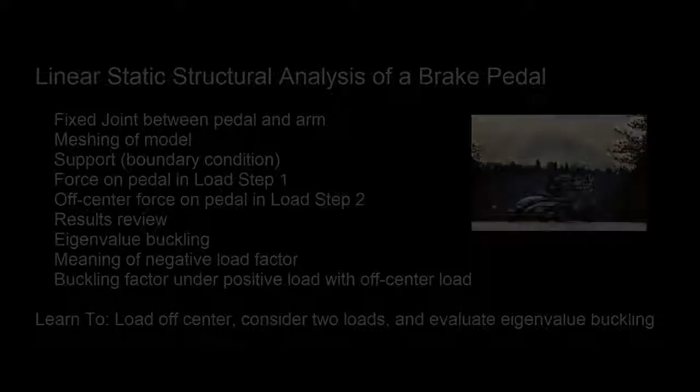And we'll do it with the off-center load from step 2. Let's go in and have a look at the model, but first, in the project schematic, you'll note that we're going to do a static structural run. And then, just to be cautious, we'll do an eigenvalue buckling analysis in order to ensure that we have a good factor of safety on buckling of the structure.

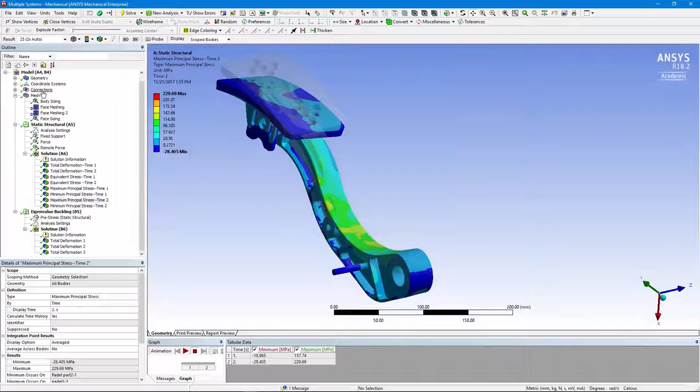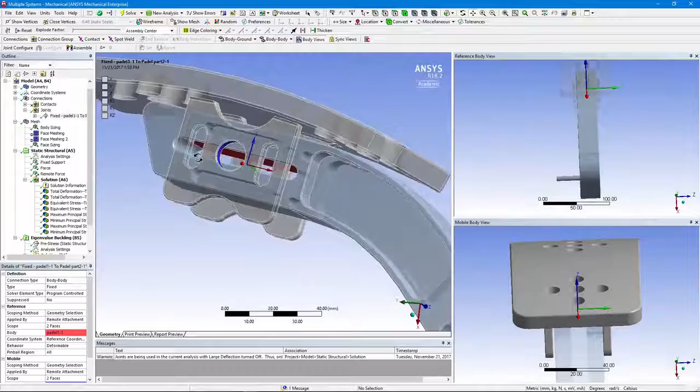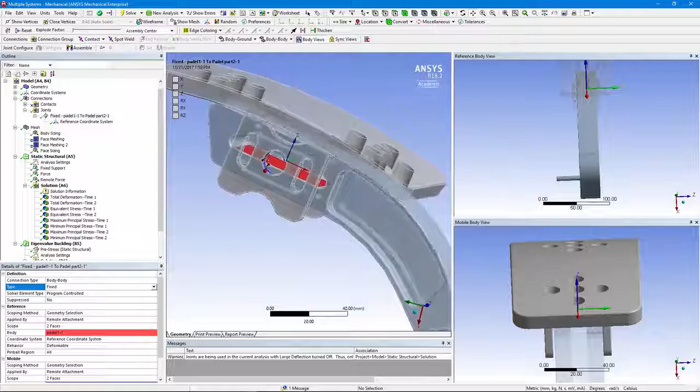Let's go have a look at the model. Here's our geometry. Two bodies, and the details of how they're bolted together have not been provided in the geometry. But what we're going to do is have a fixed joint tying these two things together so that they act as if you had one body without going into the complications of many faces in contact. So you can see that in this joint we have two red faces involved in the reference side and two blue faces in there involved in the mobile side of the joint. And this has been set right here to be a fixed joint body to body, so the parts will move together. It's a simple way to get them to work with one another.

Let's zoom back out. As for meshing, we did a bit of face meshing in order to get a cleaner layout of elements. Did a little bit of face sizing to keep elements of a tolerable size. So there's our mesh. It'll give us a first order look at what the stresses are in this structure.

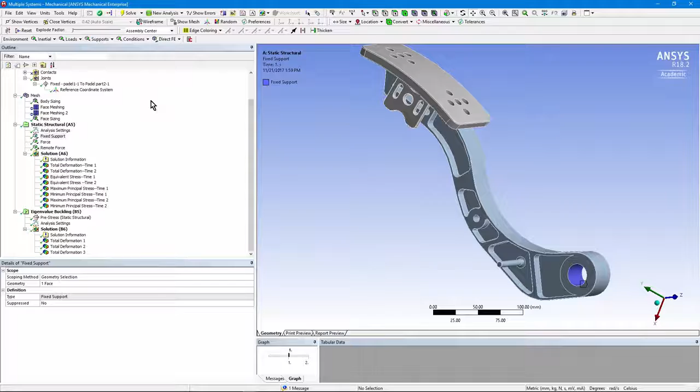In our analysis, we have two load steps. Here's the reason for this. First off, we've simply fixed the face down here, and we're going to put a load on this pedal and see what stresses result. So it's sort of a cantilevered structure. We have a force, which is spread out over this face. You can see that the angle has it perpendicular to this pedal or pedal face.

In the first load step, we're bringing that load up to 2,000 newtons. This is an estimate of the biggest load a person could put on there, and the load's been multiplied by 1.5 to get a bit of a factor of safety. So this is one of those approaches where the factor of safety will be built into the load rather than in the material allowable, where we'll probably look at yield. So there's a force. In the first load step, it's on. The second load step, it's gone again.

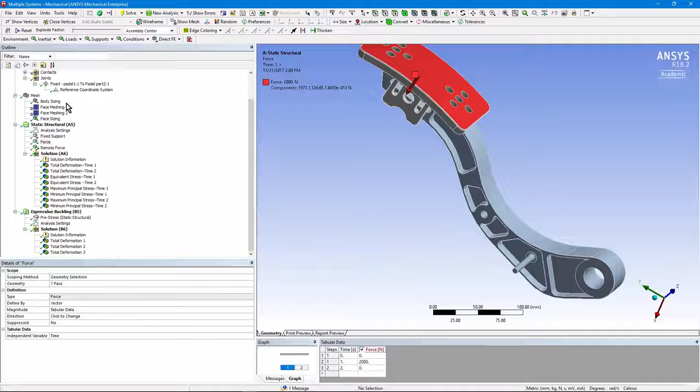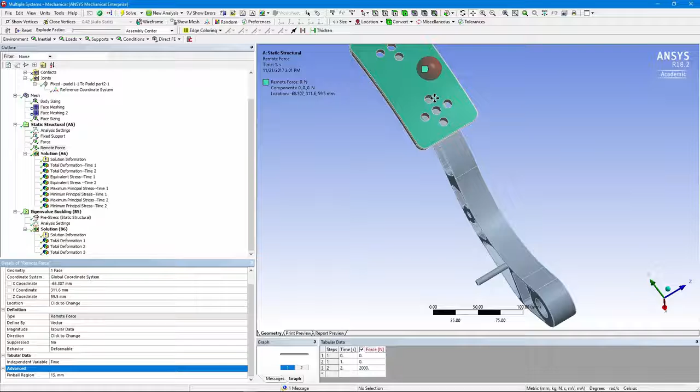Then a second load, remote force. Now let me turn on random colors, make that thing easier to see. We have a remote force. It's pushing in the same direction. It's been moved off-center. The z-coordinate has been shifted over to make it off-center. On top of that, a pinball radius has been defined, set to 15 millimeters, so the force is exerted only over this small region. That's going to put a bit of torsion in this structure. We wanted to see if that would produce a worse result when this too has been set to 2,000 newtons.

The load might be off-center if a person's foot was off-center when they pushed on the pedal. Note that it's on in the second load step. So with two load steps, we evaluate two different kinds of load on the model.

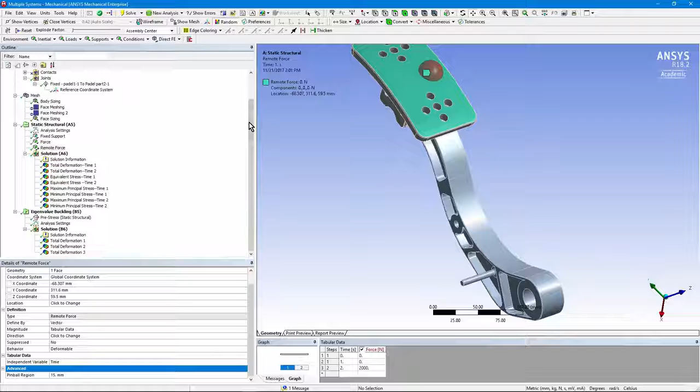It's a simple linear model, no nonlinear contacts, no nonlinear material properties, and the deflection is small enough we don't need to go into large displacement analysis. So there's our mesh. There were just over 100,000 nodes, so a bit over 300,000 degrees of freedom in this 3D model.

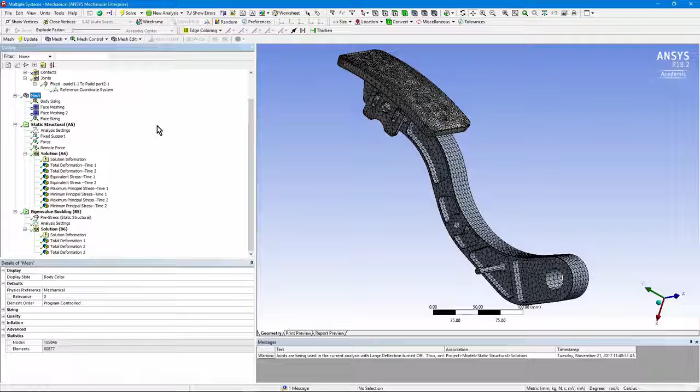Let's go see some results. There's a deformation, and you can see a ghost image of the undeflected model. Here the load is centered, and if I animate this plot, you can see that in the first load step it's pushed straight down.

In the second load step, the off-center load puts a twist into it.

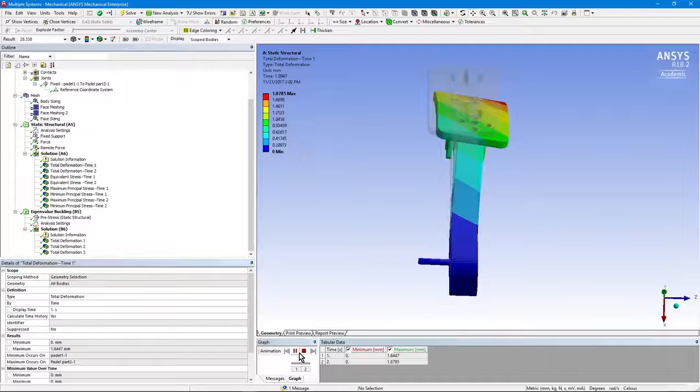Here's the state of stresses. Now this state of stresses is being shown at the end of load step 1. You can see time 1 right here.

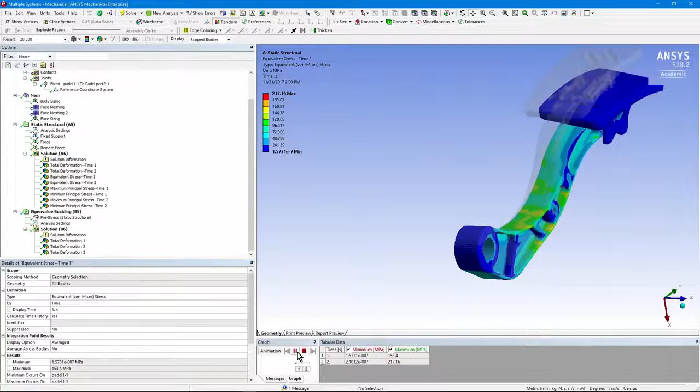Let's animate this as well. The pedal's pushed down in the first load step and you can see it twisting. And you can see that the stresses are peaking near the end of the second load step.

To get a bit more insight as to what's happening, here's a maximum principal stress. Things are going to be in tension. Now what might make this buckle is a minimum principal stress.

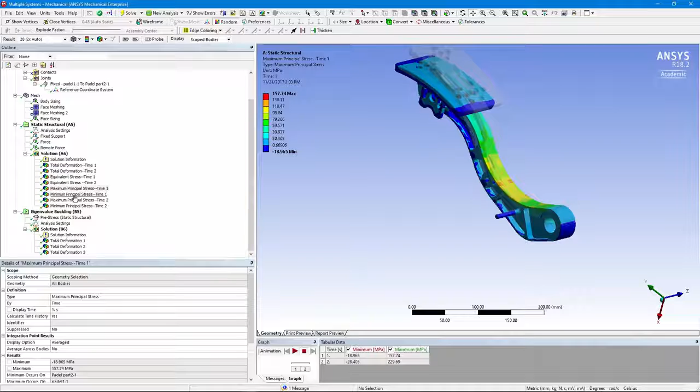So you can see down in the bottom of this thing, because we've pushed here and fixed it here, we're getting compression in the lower flange of this. It's almost like a wide flanged beam. So that compressive stress might produce some buckling.

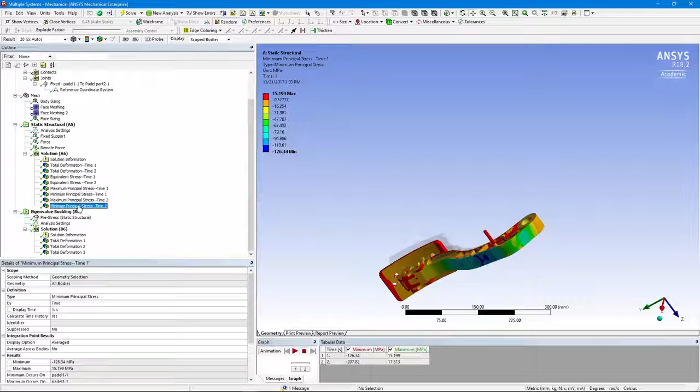And if we look at it at the end of the first load step, notice we were down to minus 126, that's megapascals. And at the second load step, we're down to minus 208. So we're getting more compressive stress when we have that load off center.

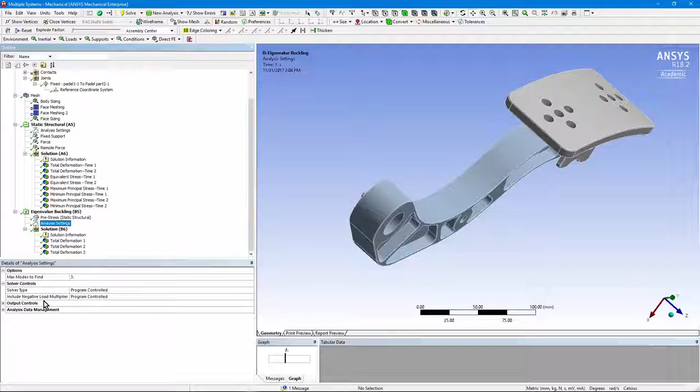So we moved on and linked the static structural run to an eigenvalue buckling run. We're considering the last load step, in other words, the load is off center, expecting that that's the worst case. And we've looked for 3 modes. We've not bothered to prevent negative load multipliers.

So when we solve this thing, what do we find? The first of the load multipliers has a minus sign in front, implying that if the load was pulling up instead of pushing on the pedal, we would get buckling. But that's not what we're going to do.

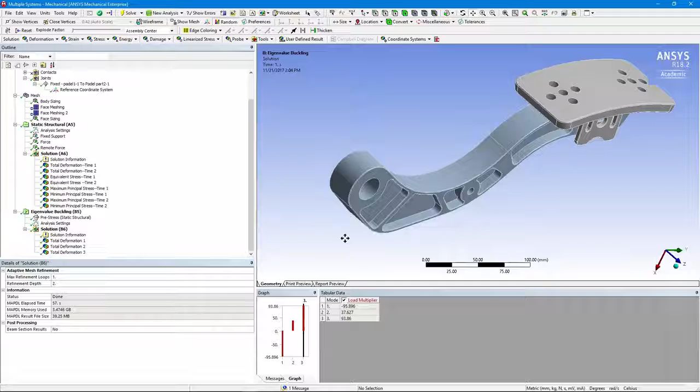The foot is only going to push on here, so we want to look at the second mode of buckling. Again, that's based on an off-center load. Let's line this model up about here and see how that thing deforms in the second mode of buckling where we're compressing the pedal off-center.

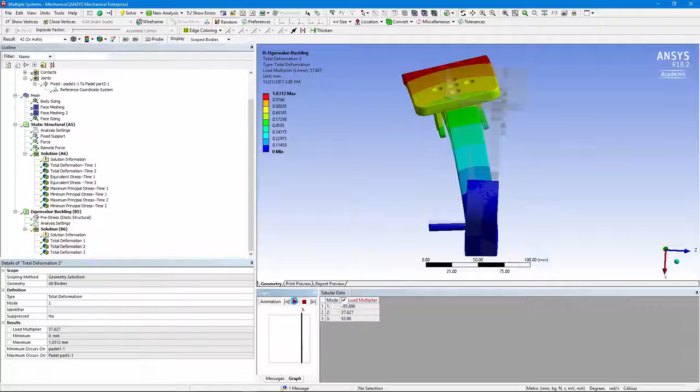Let's animate that. So you can see that the buckling is a matter of the thing twisting. Not a simple kind of buckling, but you may know from experience that with some things, when you push on them to the point that you get elastic buckling, they do in fact move away in a torsion-like manner.

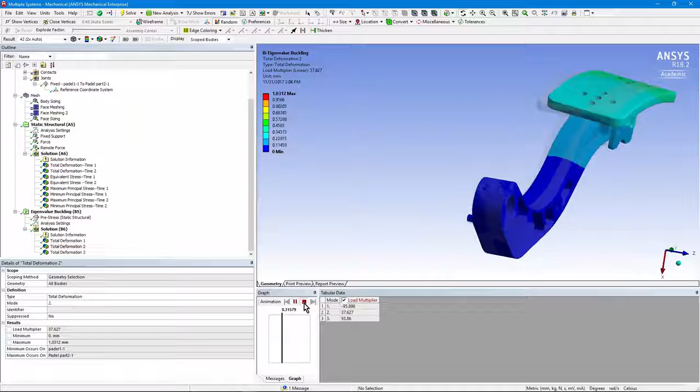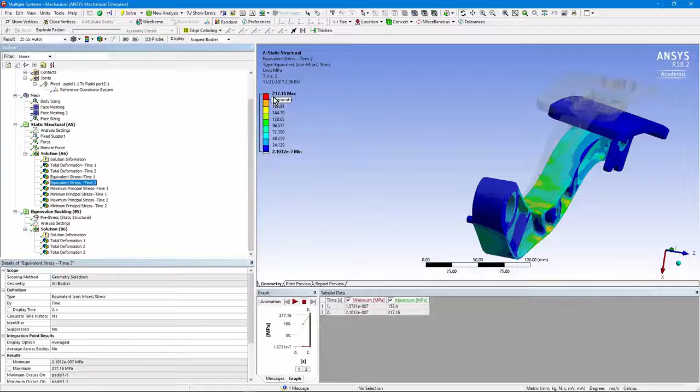And with a higher load factor, we're still getting a twisting-like deformation. But with that load multiplier being over 37, linear elastic buckling is not going to be a problem in this model. And with a highest equivalent stress that's up around 217 megapascals, ordinary steels will tolerate this level of stress also.

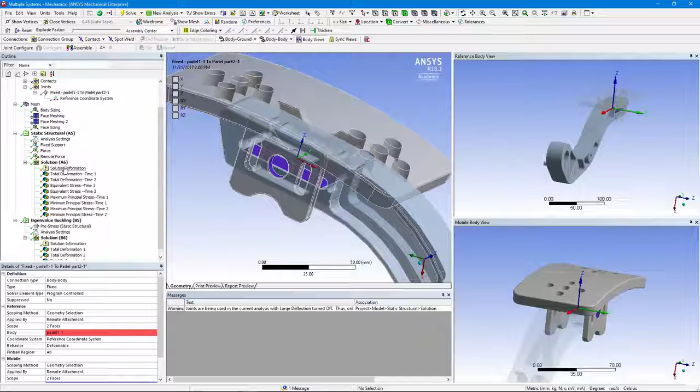So there's a quick review of a model in which we meshed geometry of a brake pedal, joined 2 parts together with a fixed joint, so there are no degrees of freedom involved, and we evaluated the state of stresses with that 2000 Newton load.